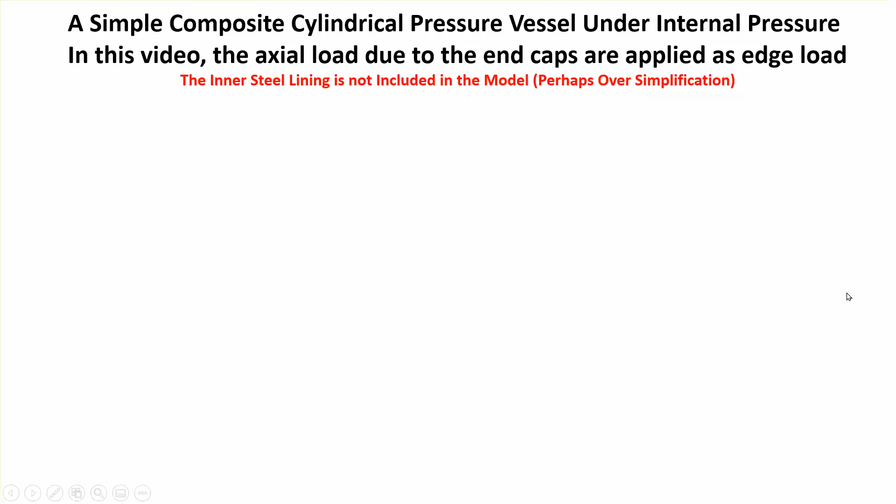So we have a pressure vessel like that, and on the surface of it there are three layers: 15 degrees, minus 15 degrees, and 90 degrees. The diameter of the vessel is 12 inches, and these are the geometrical properties, and it's internally subjected to 1000 psi.

Now, in this video, I'm not going to model the end caps, okay? And that being the case, you can ignore this line, but in the follow-up video, of course, these ends are also made of two-layered composites, which we're going to use.

So we're going to assume that the thickness of the ones that are 15 degrees and minus 15 degrees is the same, 0.05, and the thickness of the lamina or ply which is 90 degrees, going circumferentially, is 0.15 inches. All right, let's move on.

My modeling strategy is going to be, obviously, this is your cylindrical surface, so this is what I'm going to be modeling. And these end faces are going to be subjected to edge pressure, or edge load, actually axial load, which are coming from hand calculation.

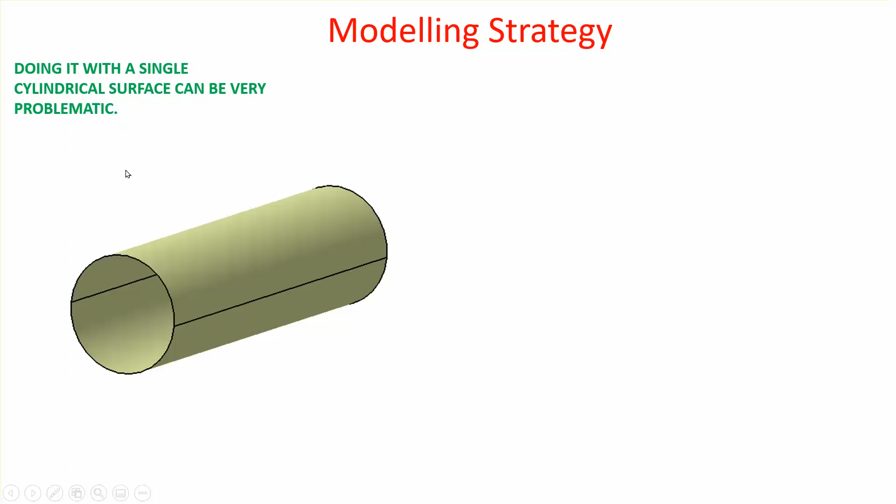So my strategy is to actually model this cylindrical pressure vessel as two half cylinders, the top one and the bottom one. For each one of these, I will define a rosette. The only difference between the two rosettes is that in the bottom one, Z goes down, and in the top one, Z goes up, and the direction of X is also changed. This allows me to easily create those plies without any glitches.

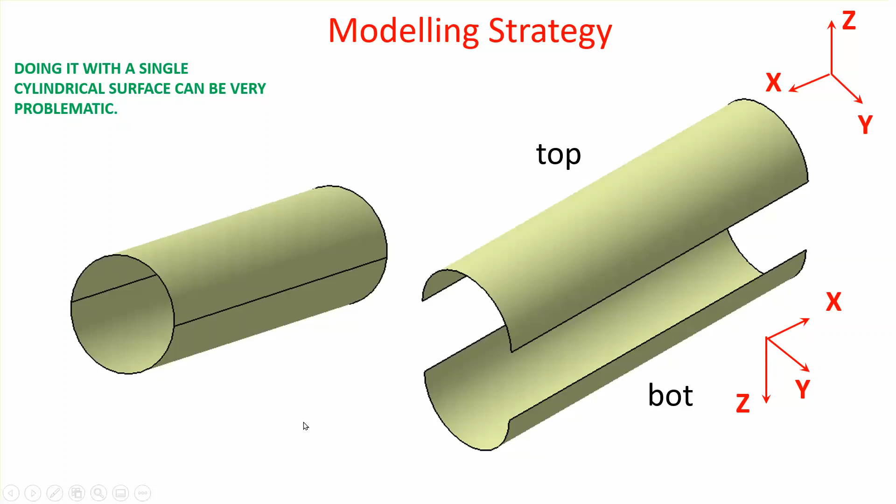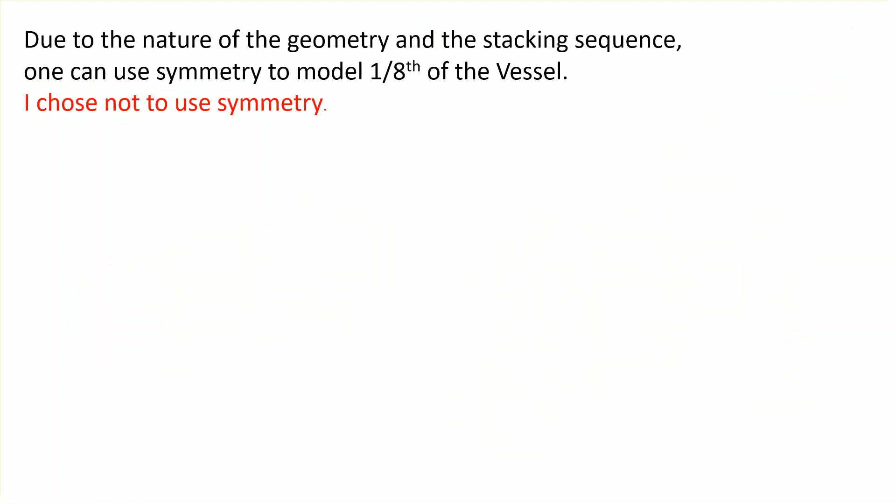So this problem, because of the nature of the geometry and the loading, and of course the stacking sequence, there are planes of symmetry. There are two planes of symmetry, actually three planes of symmetry, but I'm not going to use any of them, so I will model the actual vessel.

The hand calculation that I was talking about comes from basic strength of material type calculation. So you can see if you take a patch out of this wall, this is basically under biaxial loading. There's no shear in that particular patch.

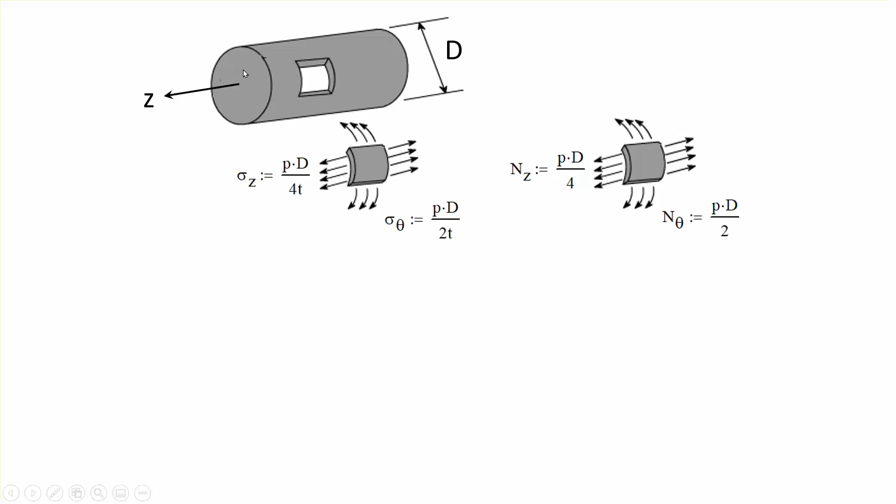Okay, and what I'm going to be doing is this value that you see here is called NZ, pressure times the diameter over 4, is what I'm going to be specifying on the edge, on this circular edge, without actually modeling the cap itself, front and the back. So basically, this is what I'm going to be doing.

Based on the dimensions that I gave you, that thing that I'm going to be applying to the edge, circular edge on the left and on the right, is just 3,000 pound-force per inch. Okay, and of course the internal pressure is 1000 psi. Notice that we no longer have a cap. This is why we're replacing it with an equivalent static load, which is this edge load.

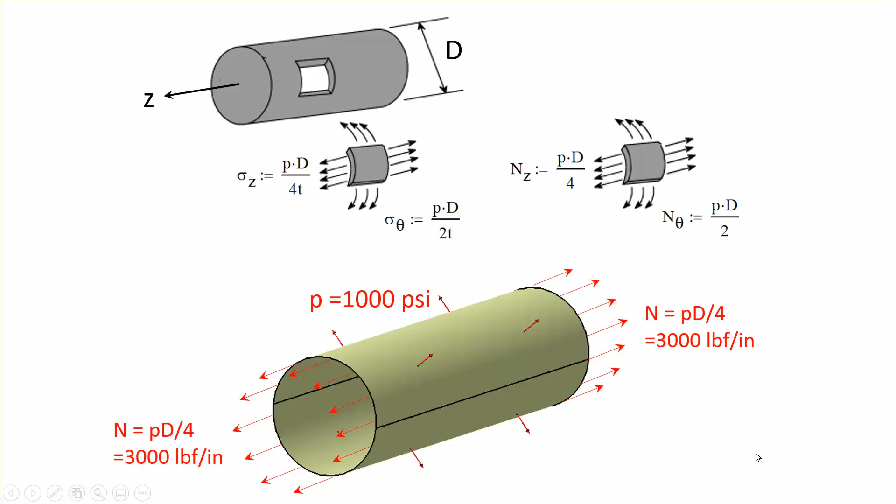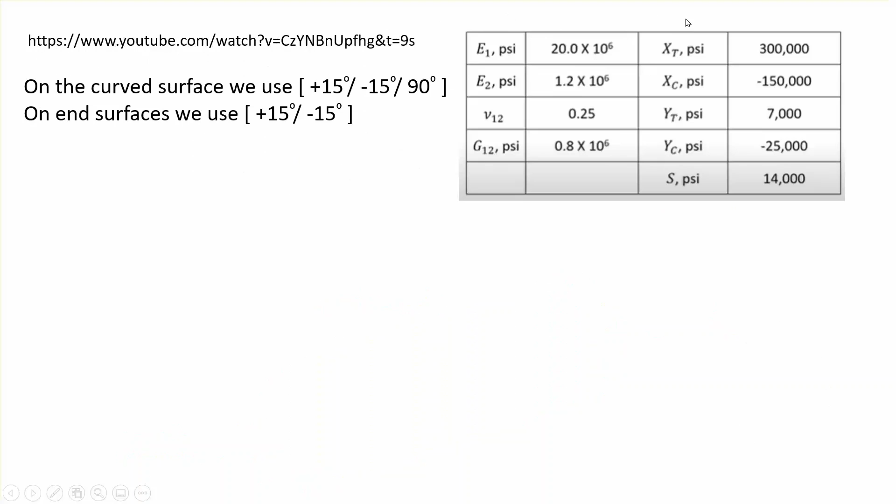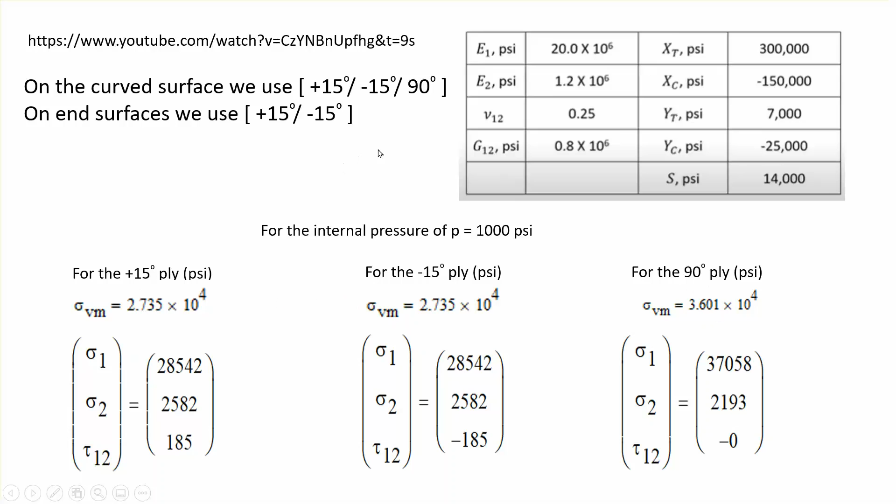Now notice that for all practical purposes, these are zeros compared to those other two numbers because they're orders of magnitude smaller. Okay, so von Mises stress for the 15 and minus 15 is going to be the same, roughly 27,000 psi, and for the 90-degree ply it's going to be 36,000 psi. So we're going to be comparing our Catia FEA results with these numbers. Okay. All right, let's move on and make it. So I'm going to keep this thing handy here, down below.

First thing, because I have two different thicknesses for these different plies, in other words, 0.05 inch for the 15 degree and minus 15 degree, and 0.15 for the 90 degree ply, I'm going to create two materials. The properties are the same except for the cured thickness. So let's go ahead and do this thing at infrastructure, material library. I'm going to create one.

So this one, let me first of all call this thing, so I will call it carbon epoxy, 0.05 inch, right? The 0.05 inch as the cured thickness, basically. So apply. So notice that the name changes here. And then for composite, we're going to say unidirectional, okay, unidirectional, and the cured thickness is going to be 0.05 inches. Okay, so that's this. And then for analysis, we're going to use 2D orthotropic.

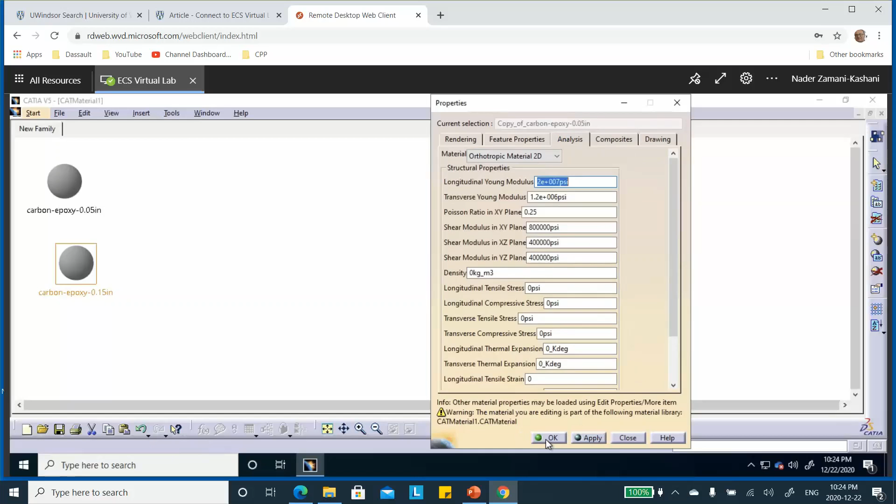And I'm going to set that value. So under the composite, this is going to be 0.15 instead of 0.05. Okay. And apply. And then I don't have to input these things because they're the same values. Okay, good. So we say all right, and now we're going to save this thing in that folder that I have created on my desktop. What is that? It was called pressure vessel. Let me see now.

I thought... I don't see the name, so I'm going to create actually what I want. So we're going to say new folder, pressure vessel, PV ends not modeled. So that pressure vessel's right there, and it's not modeled.

And this library that I created, why don't I give it a name instead of Material 1? How about calling it pressure vessel? Pressure vessel. It's going to go into that folder. Everything that I made is going to go into that folder, including my material library. So I'm going to close this. Now we're going to start our part. So let's start with the part file.

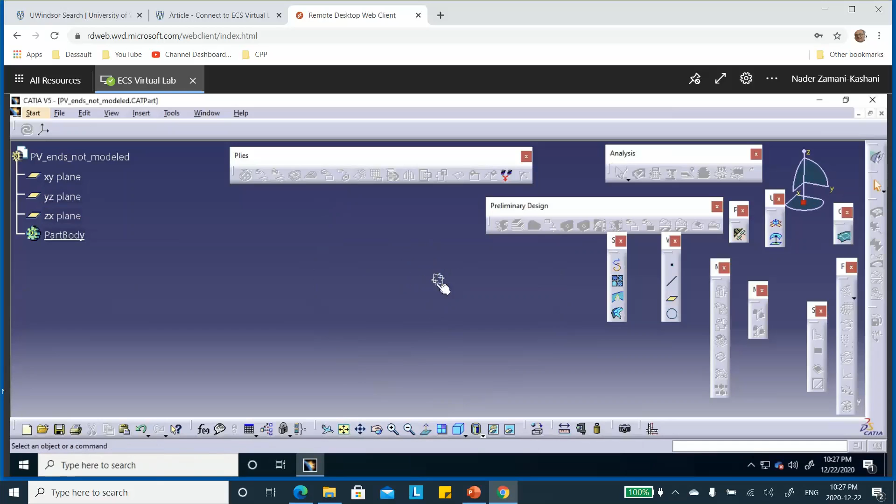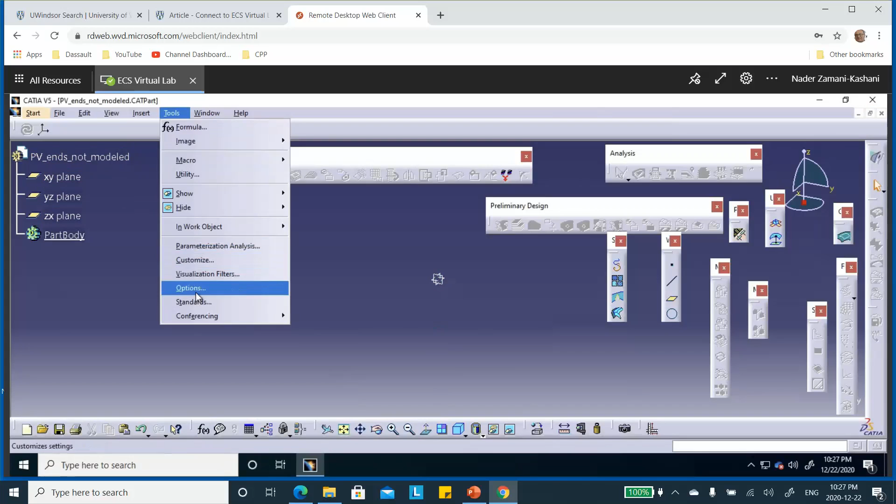All right, I noticed that these planes are very small. Of course I can zoom in, but something is not right here. Let me see if I can change the plane size. So tools, options. I didn't expect to run into this problem, but it's okay.

We'll find it. Infrastructure, mechanical, part infrastructure, part design. Well, actually not there. Sorry. Infrastructure, part infrastructure. Part infrastructure right there, and display. This axis system and plane. Maybe I changed this thing, so we'll see how it looks. There. Oh, whew. Okay. So save it.

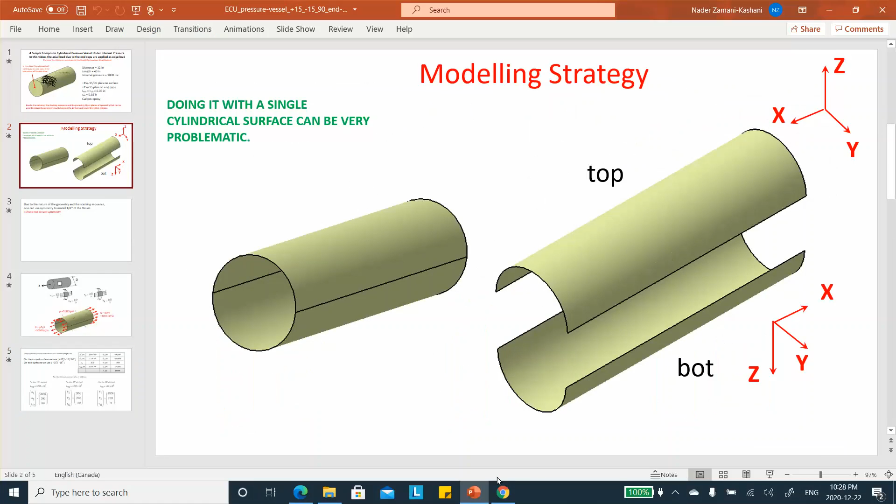Now, notice that my strategy is to make these two pieces. So the radius here is 6, and the length is 40 inches. So we go to the YZ plane, sketch. You have to be in Generative Shape Design to create surfaces and things like that. So we're going to sketch. Okay, circle. That.

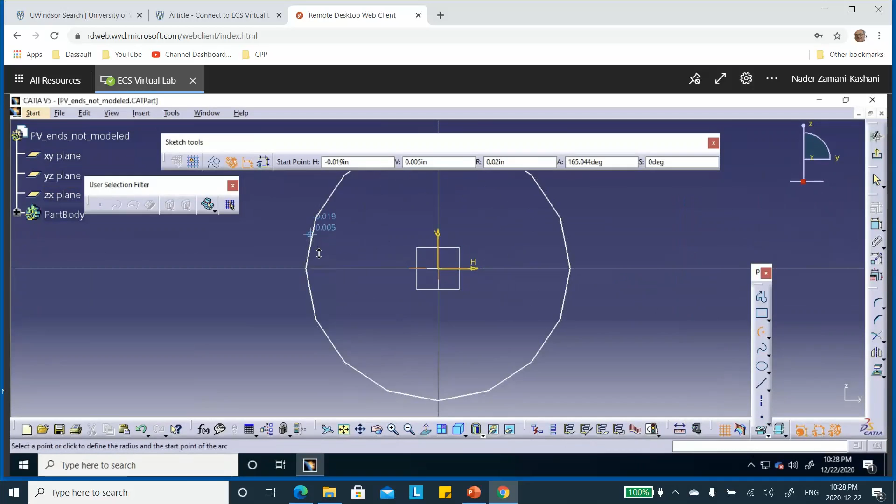Okay. I noticed that because I made some changes here, that's why grid size and things like that look weird. So let me first fix this thing. Let's put some dimension here. This is supposed to be 6 inches, right? 6 inches, and fit. That's a lot better.

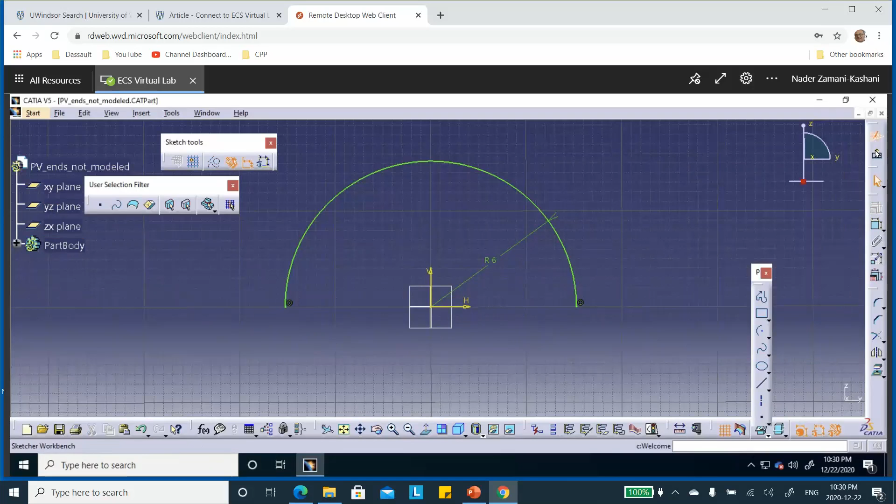And I just noticed that this point is not exactly on that line. So this point, control, that axis. We're going to make it coincident. There. Very good. So exit. And then we're going to extrude that. There's the extrude. Mirrored extent. And 20 inches in each direction, so that gives you a total length of 40 there.

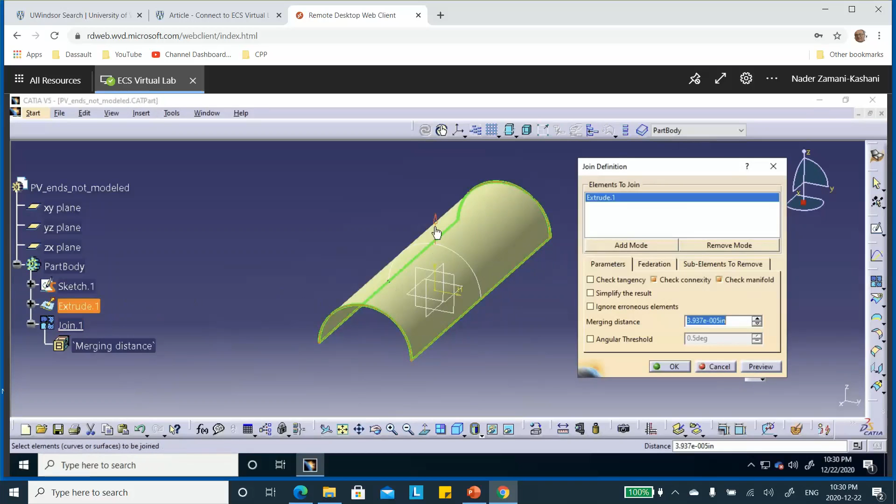Now, if you watched my earlier videos, you notice that I always join this thing, because when I join, it basically gives the surface a direction. In this case, the direction arrow is up, and I flip this so that it goes down. When you do this, you give it a direction. When you create shell elements, the normal to the shell elements always goes opposite to the normal of this join entity, which means you have control. You're not going to get unexpected normals to the shell elements.

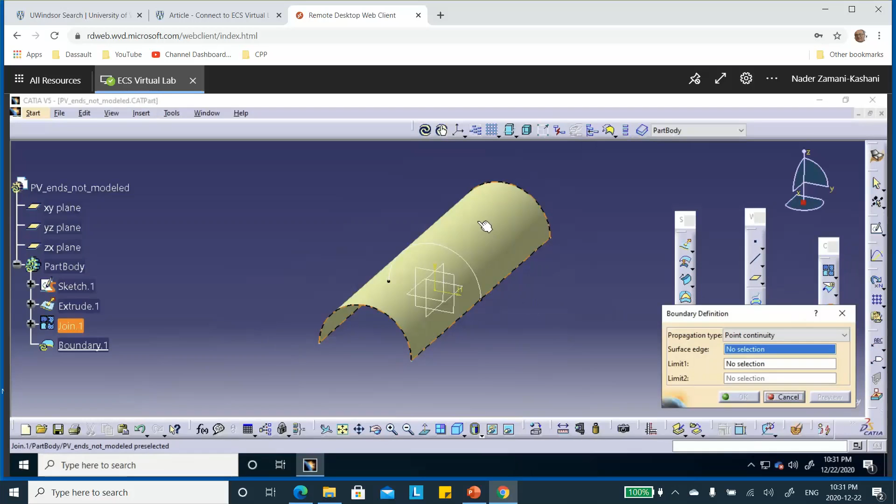Okay, so the next thing I want to do, I want to extract the boundary of this. Where is the boundary? Let me move this thing out. The same place that you see the join right there. There's the boundary. See this? You click on it and you select that join surface, and it extracts the boundary. Okay, so there. And that's pretty much it.

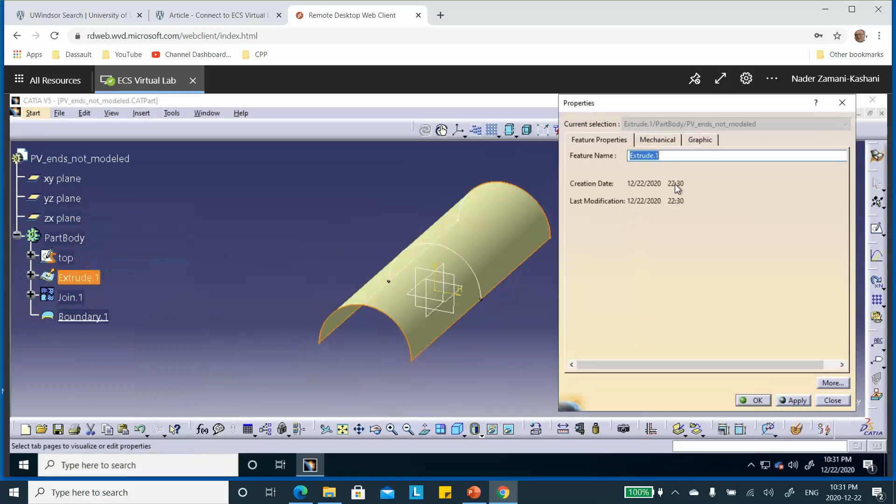The only thing I'm going to do is rename all of these to say top. So right click, properties, top. This is for bookkeeping purposes. You always know what you're picking later on. So properties, top, properties, top. And the last one, boundary, also top.

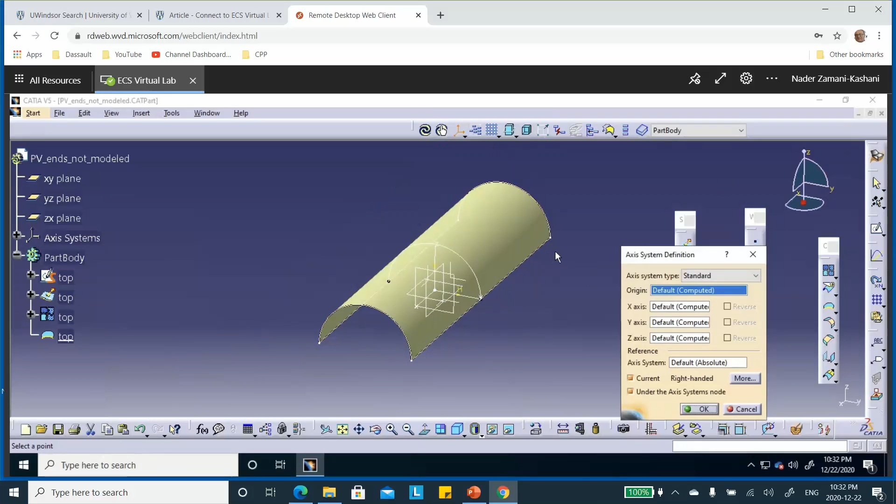Now at this point I also will create an axis system, which I'm going to call top. So there is the place that you use axis system. You click on it. Now, ordinarily, it places it at the global origin. You can see that it's right there with Z pointing up, aligned with the global XYZ. This is fine, there's nothing wrong with it, except that I would like to move this thing a little bit higher so that it doesn't clog the picture. Either higher or, yeah, maybe that's a good idea.

So I'm going to put the cursor there, right click, create a point, not on a curve, with coordinates. So the height of it, remember the radius was 6, so I'm going to make it 10.

So that point origin is going to be way up there. Preview, so it's going to be right up there, maybe even higher, 15, right. And say, okay, I'm happy with this, except that I don't want this thing to be my current coordinate system. So I'll uncheck this thing, it becomes solid, it becomes dash.

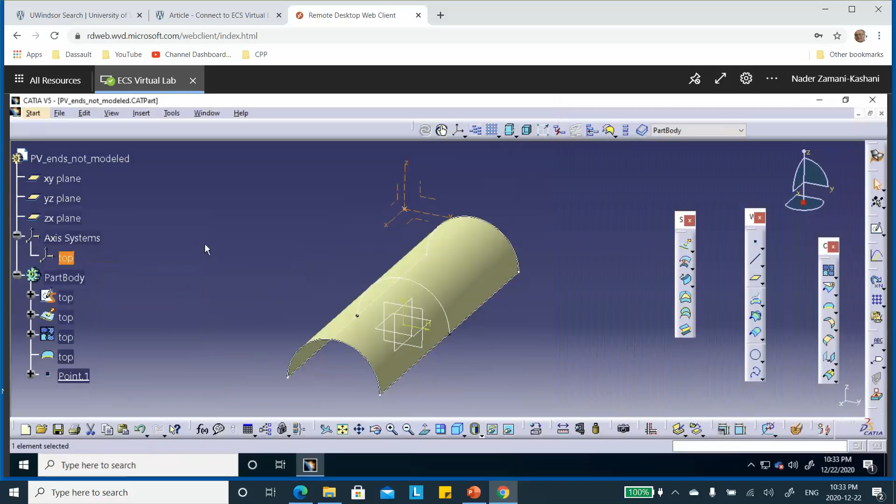That means that the global coordinate system with origin sitting down here is still the global coordinate system. While we're at it, we're going to rename this thing also to say top. So properties, top. I will repeat exactly the same thing for the bottom piece, okay? So once again, on the YZ plane, we'll sketch another circle like that, semicircle like that.

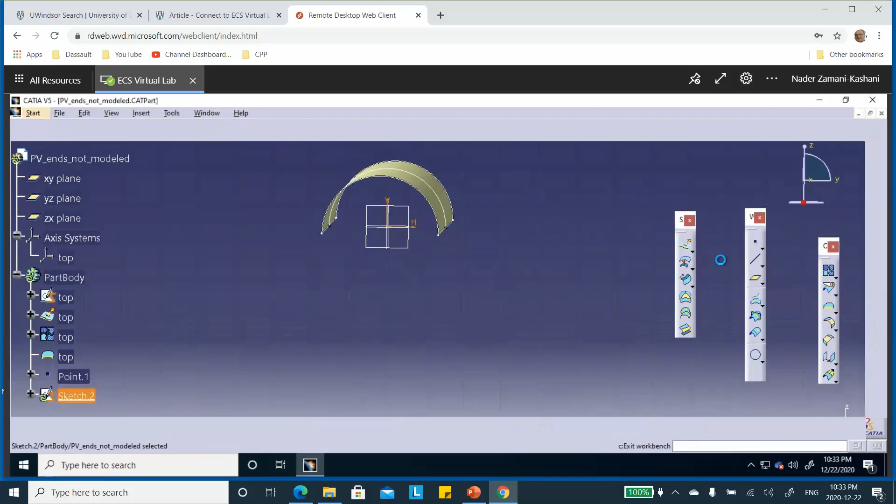There we are. Give it a dimension. It was 6 inches. 6 inches. Okay, exit. And then we're going to extrude it. There's the extrude. These numbers are the same as before, so it does it correctly. Okay, and then I'm going to join it.

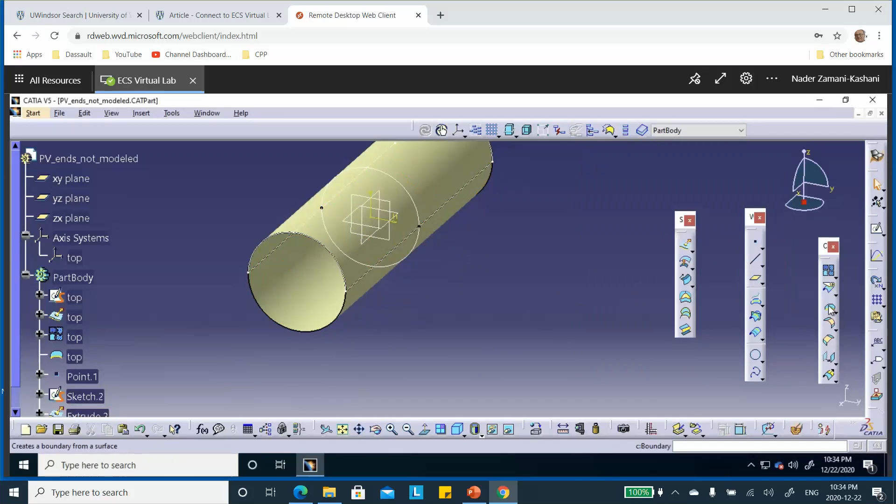You click on the join, click on the bottom surface, and just to double check, you click on it, you see that the arrow is going to be pointing away from that surface. I click on it so that it goes towards the inside of the cylinder. And finally, the boundary. There's the boundary. See that? And you select this thing that you joined. The boundary is going to be extracted, and you're going to say okay.

The reason that we need these boundaries is because later on we're going to create plies, and I'm going to do that manually for you, although it's a laborious process. You have to do it, I don't know, 6 times, 5 times, but you have better control. You can do it with zone method and things like that. You just leave it the way it is.

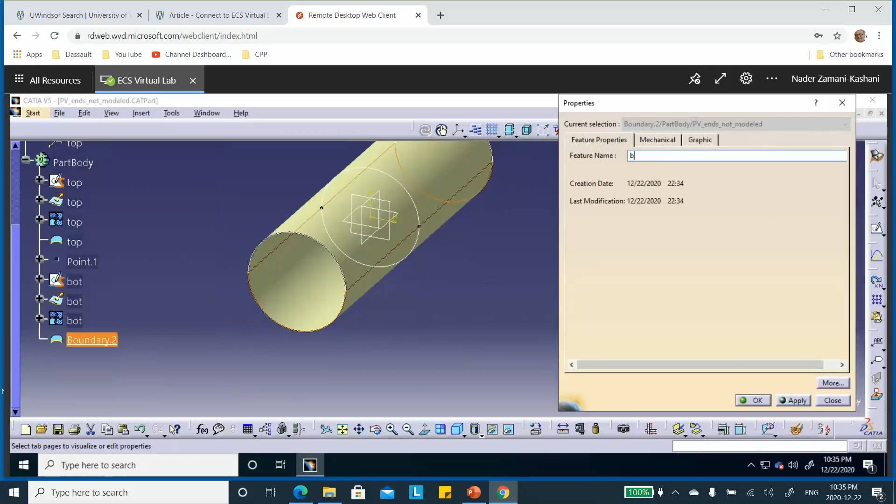Okay, so let me call this thing top. Sorry, bottom. So properties, bottom, BOT, properties, BOT, join, we're going to make it BOT, and boundary, we're going to make it BOT. These steps are not necessary, but it allows you to have a better idea when you pick something what they are. Then we're going to create our coordinate system,

create a point. Notice that I already have the set, not on the curve, by coordinates. I already have my 15 here, so I make this thing minus 15, and it will create a point down there, except that, first of all, I want Z to point down. Remember, the other one is up here, right?

I want Z to point down, so I put the cursor on the Y-axis, right-click, and rotation. And if you rotate by 180 degrees, minus 180 degrees, it'll take care of it the way I want, minus 180. Notice that Z is down, X is going to the right, exactly what I wanted, and we say okay.

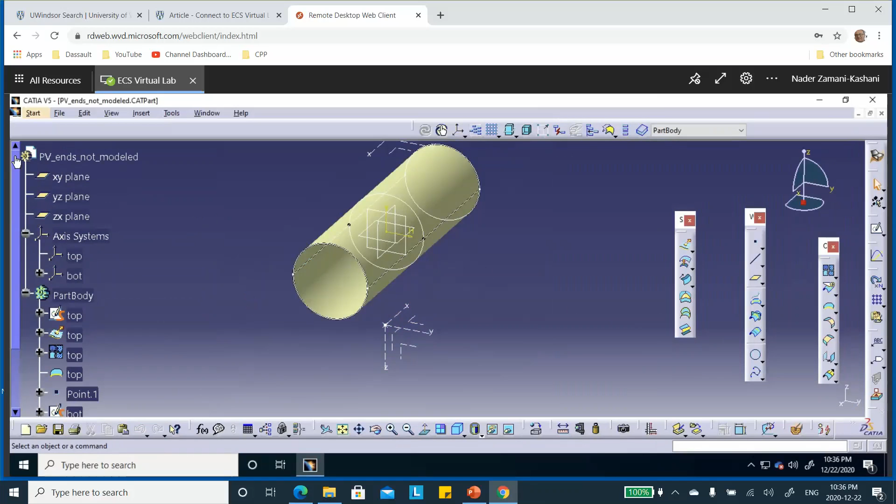Now why don't we also call this thing bottom? Right click, properties, BOT. Okay, very good. Okay, so save everything. We are pretty much done as far as creating the model is concerned. So let me go ahead and switch to the mechanical design and what is that? Composite design.

First thing we're going to do is to create our composite parameters right there. Add the material. We're going to go to that library that I created. It was on my desktop, and it was called pressure vessel ends not modeled. There's my material library. Remember I created this?

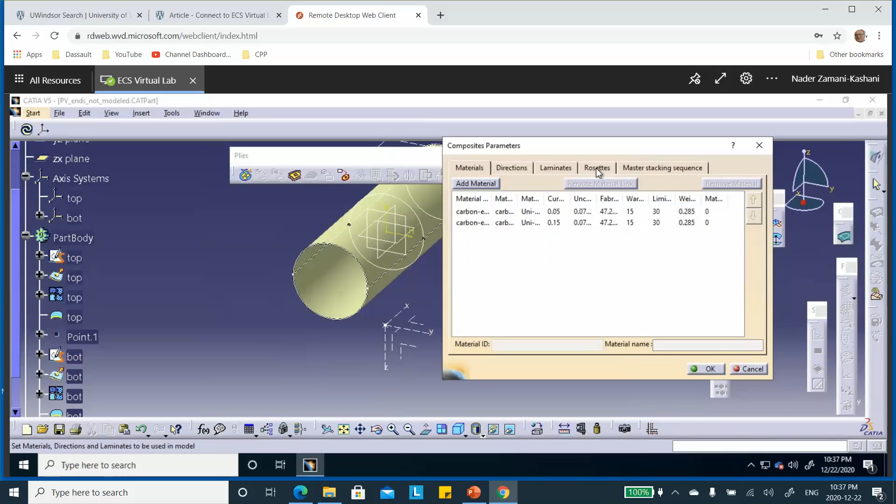You say okay. They'll tell you that there are two materials in there, and I want both of them to be used. Okay, so I say okay. That's the one with the cured thickness of 0.05. And then again, add material, cured thickness of 0.15, which is going to be used for the 90-degree ply. Okay, very good. Now here, we also have to create a rosette, add a rosette.

Now, these are going to be used as my rosette. So add a rosette. And axis system is, I'm doing the top one, right? So there we are. And you have a choice of Cartesian. There is no cylindrical here.

If you go to the drive shaft video segment that I already posted, this window looks a little bit different. It's Cartesian or cylindrical. Here they have added a few things, and you can do cylindrical here too, but I'm not going to worry about that. Notice that the good thing is that when I selected Rosette 1, it created top axis system. While I'm here, why don't I give this thing the name top Rosette? How about that? Top Rosette.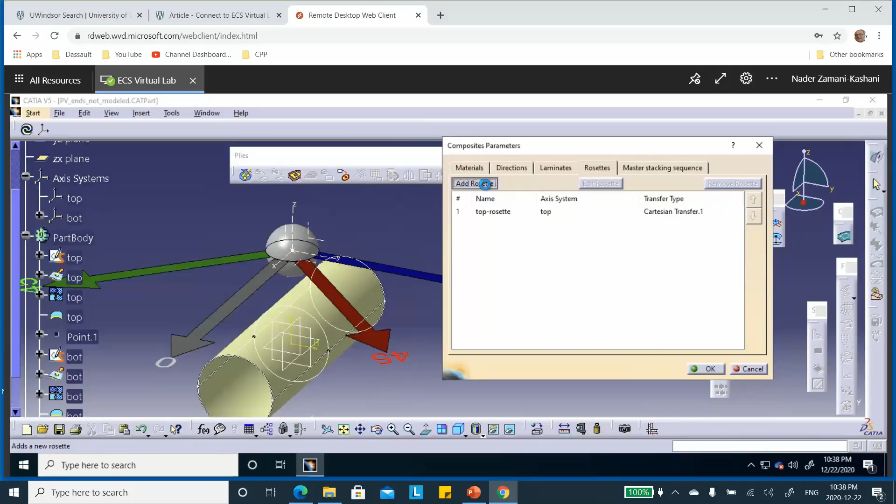I think it is double T. Okay, nothing else. So it's Cartesian. Everything is good. We say okay, and add another one. This time we use this bottom one, and I will call it the bottom rosette, BOT rosette. And again, it's Cartesian, so we say fine. So the two rosettes are created also.

This window also looks different, okay? So if you're using older versions, R21 and prior to that, you have to do the same thing, but the dialog boxes are going to be different. And we say okay, so we don't need these rosettes. I'm going to hide them. Hide and hide. Excellent. So do a save. And now we're going to create our plies.

The first thing is we're going to create a ply group for the top section. So select it. Surface is of course here. Notice that the top surface is selected. The name of this, I'm going to change this to top ply group basically. And the direction of the draping is downward. I want to stack them in the upward direction. So flip it. Notice that it flipped right there. You can see that. Flip. And for the rosette, I'm going to select top rosette. Okay. And that's pretty much it.

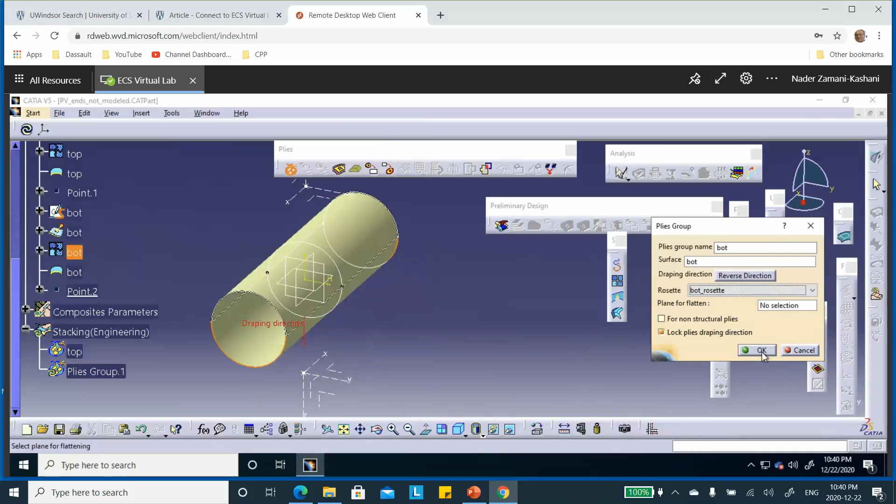So we say okay. While we're at it, we might as well create the bottom one and then we create our plies. So here is the other ply group. So we're going to call it bottom, BOT. For surface is the bottom surface. Flip the direction so it's stacked outward. And for the rosette, I'm going to select the bottom rosette. And that's pretty much it. Okay.

Now we're going to create our plies. So let's work on the top one first. You click on this ply. It says go and select your ply group. So I'm going to do the top one first. Notice that there's going to be ply one. Now for the boundary, for the curve of the contour, I can go and select that top boundary that I extracted. See that? And then attribute is going to be 45 degree. The first one is 45 degree. I don't have to worry about top rosette because it's already selected automatically. Notice that the ply is created here, right there. You can see that.

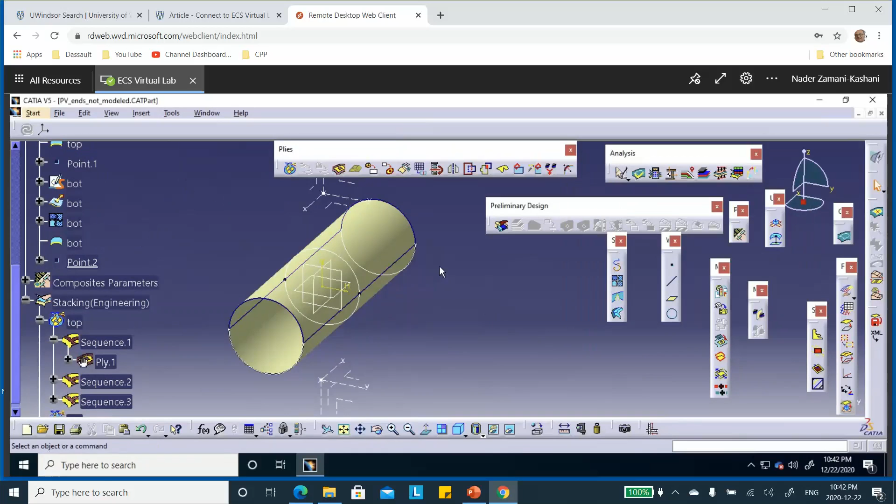Let's do another one. Again, the same ply group. The boundary is still the same as what was up there, the top. The attribute is going to be minus 45. Okay, the third one, the third ply in that top group, boundary is still the same. And for the attribute, we're going to say 90 degrees. Now notice that this is a kind of laborious process. So it was easier if we created these plies using a zone. If you had 50 of these, then you really don't want to do it 50 times, although you can actually copy and paste plies. But anyway, this is a simple problem. That's all right.

Now let's do the plies for the bottom group. So click on the manual ply, you select it. And for the boundary, for the contour, you're going to take the bottom boundary, and for the attributes again it's 45 first. Okay, next one, same group, the boundary is BOT, attribute is minus 45. Oh, I don't know why I said 45. This should have been 15, right? So okay, I made a mistake, so we're gonna fix it, don't worry about it.

Okay, let's do the last one. The last one is actually still 90. So the boundary is BOT, attribute is 90. We say okay. I made a mistake because I thought these were 45-degree plies. Actually, they were 15 and minus 15. So we can always go and fix it. So we go back to composite parameters here, and under directions, these are the default ones. I want to add 15 and minus 15 to it.

So I add a direction. I say 15 and 15. The value is 15. Let me change the color because later on I want to be able to see these things. Another one, minus 15, minus 15, and value minus 15 here. And the color, I'm going to make it darker brown. So we say okay. We say all right.

Now, what we have to do, unfortunately, I have to change my ply angle. So I go to this ply 1. Under attribute, instead of 45, it is plus 15. Instead of 45, it's 15. And I go to the second ply.

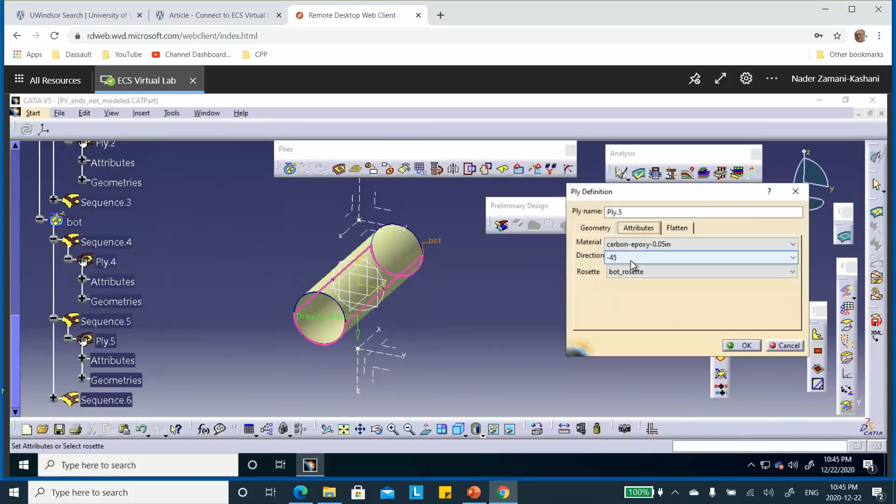And for attribute, I choose minus 15. And I have to do the same thing for the first two plies in this other group. So for attribute, instead of 45, I want 15. And this other one is also, instead of minus 45, I want minus 15. Okay, I didn't mean this thing to happen, but it's good if you didn't know how to do it, or if you wanted to make another practice, we just did it.

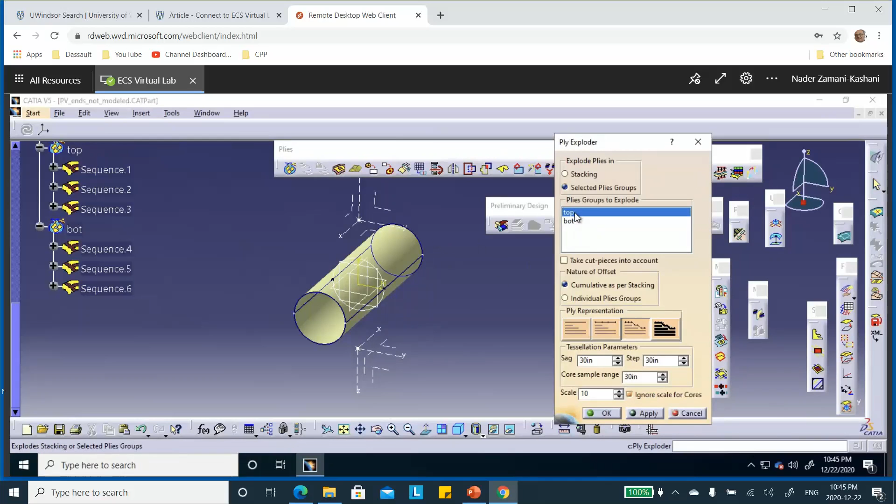All right, let's save everything. Let's check actually. So you can go and select the ply exploder. I have two groups. The top group, it should be 15, in other words, brown, darker brown, and then 90, I think it's maybe blue, I don't know, let's find out. There, yeah, okay. Let's change the scale here so that we can see it better. We may make it 20, apply, yeah. So you can see that it is 15, minus 15 and 90.

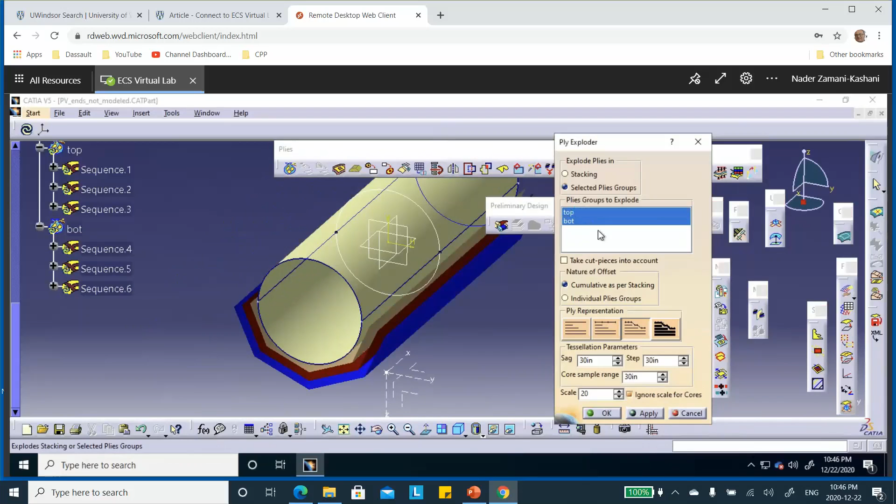And if you go to the bottom one, same thing should happen. There we are. If you want both of them to show at the same time, apply, there. Okay, so they match, cancel. Very good, save. Now we are pretty much done as far as the modeling for the composite is concerned. Now we're going to go to generative structural analysis and mesh this thing.

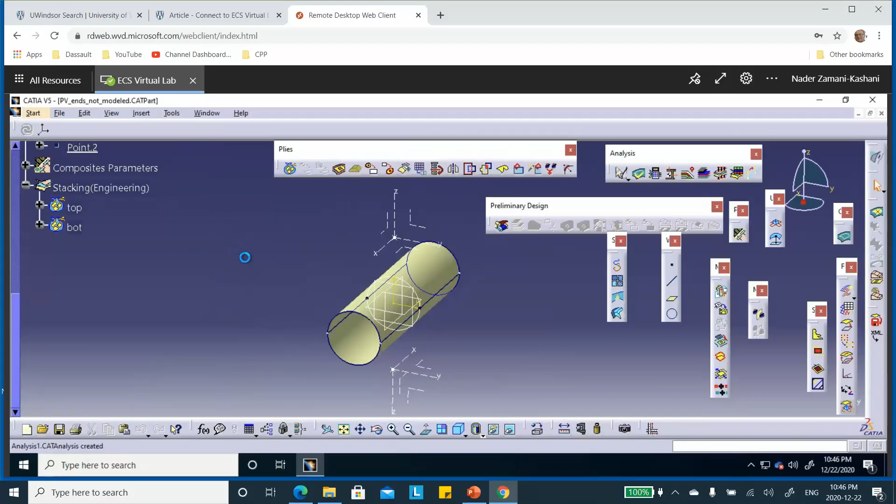I want a fancy mesh, so instead of going to generative structure analysis, I'll go to advanced meshing tool. Just like I did in many other videos before, we say okay. We're going to use the surface mesher right there. Select the top. 0.15, I'll leave it at 0.15 and then we see if it's too fine, we're going to change it. And then zap it or mesh it. And there we are. I think this is too fine. Yeah. So can say okay and exit.

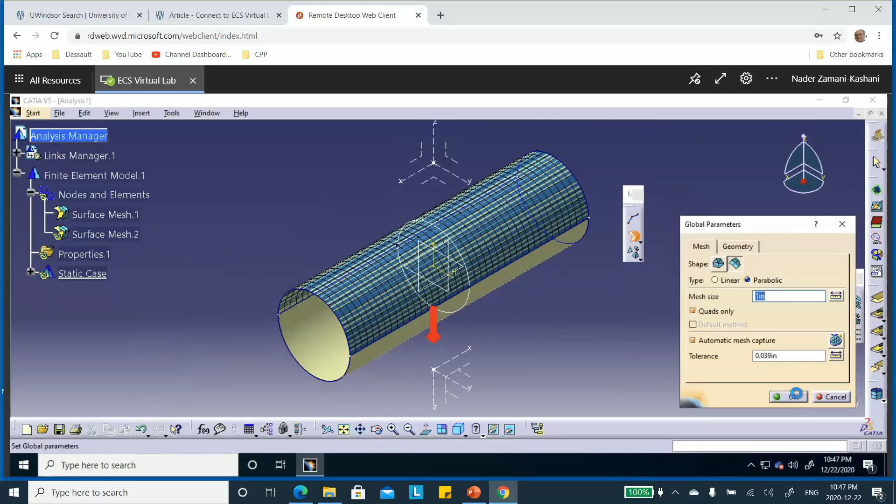But what I can do is I can double click on this surface mesher that I created. I'm going to change this thing to 1, by the way, parabolic and quad only, and then mesh it, zap it. There we are. Visualize, exit, and I do the same thing to the bottom one, surface mesher, the bottom joint surface. Everything is the same. Mesh it. I say OK, and exit.

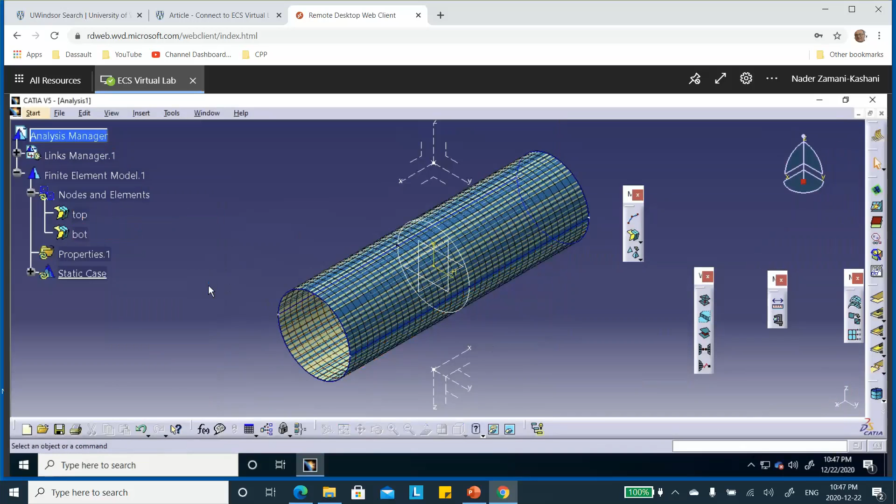Now it's a good idea if I change these names too. So this one is the top one, top, and this one is the bottom one, properties, bottom one, BOT. Okay, so now we're going to go to generative structure analysis to apply the loads and restraints and properties. You have to go there. You have no other choice. Advanced meshing tool is only for meshing.

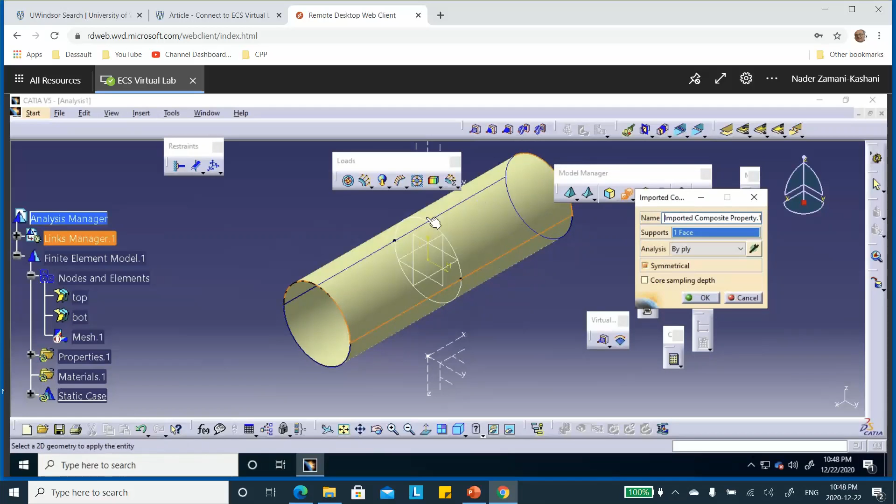If you want to see your mesh, you can put the cursor there, right-click mesh visualization, and there we are. If you're happy, just uncheck that, deactivate that. Okay, good. So let us actually apply properties, composite properties. So imported composite property. It's asking you, let's do the top layer first, or top part first. So the support is going to be this thing on the top, and for the ply, you're going to go to your tree and select top.

Okay, remember you have two ply groups. So the top one is what we're doing now. We say OK, and the symmetry means that it's going to be stacked symmetrically about this surface. We talked about this symmetrical checkbox in other videos. If you want, you can look at it and do it again. So the bottom surface, ply, and bottom group. Say OK, keep it symmetric, and we say OK.

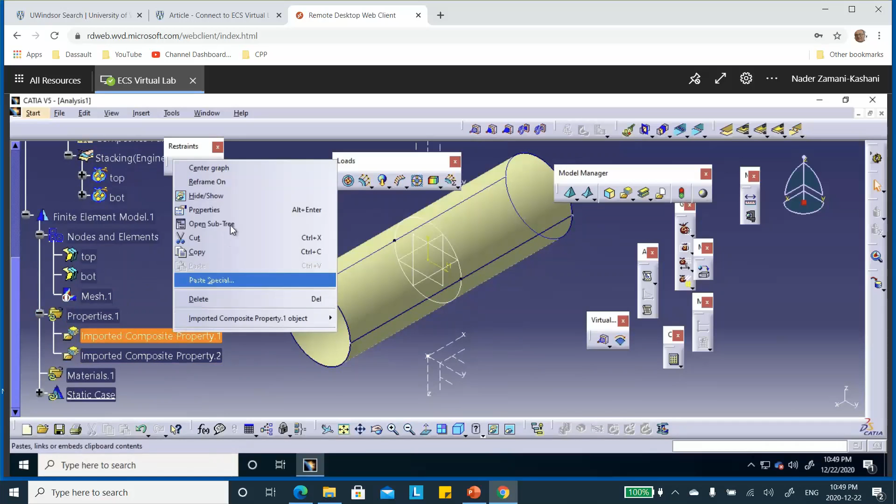Notice that the properties are created here. This is the first one, and this is the second one. Why don't I give these things meaningful names too? This is going to be top, and this is going to be bottom. Properties, BOT. You say OK.

All right, by the way, once you specify the properties without even applying loads and restraints and things like that, you can actually check and see whether the directions are correct. So what you can do is you can put the cursor on properties right there. See that? Properties, right click.

Before I do this, before I show these directions, I know that I don't have any loads and restraints. I understand that, but we can always say run and show me the mesh only, because I don't have anything else. And it did it.

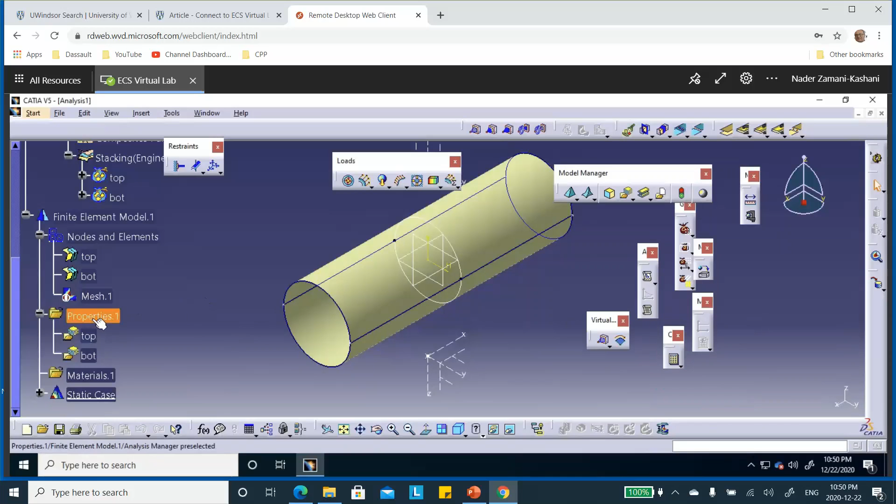Now, when you put the cursor here, right click, you see some other stuff showing at the bottom. So generate image, composite angle, symbol, and you say okay. Except let me unhide the part because it's easier to see what's going on.

There we are. Notice that these are the 15 degrees on the top, 15 degrees at the bottom, and the choice of the rosette, direction of the rosette and things like that - if you don't do that, these won't line up. I talked about this thing in the drive shaft video, so you can look at it, but this is okay.

So now you can also look at the other layers. If you go here, not the mesh, right here, double click on composite angle, more. This was layer one. If you go to layer two, notice that the direction changes.

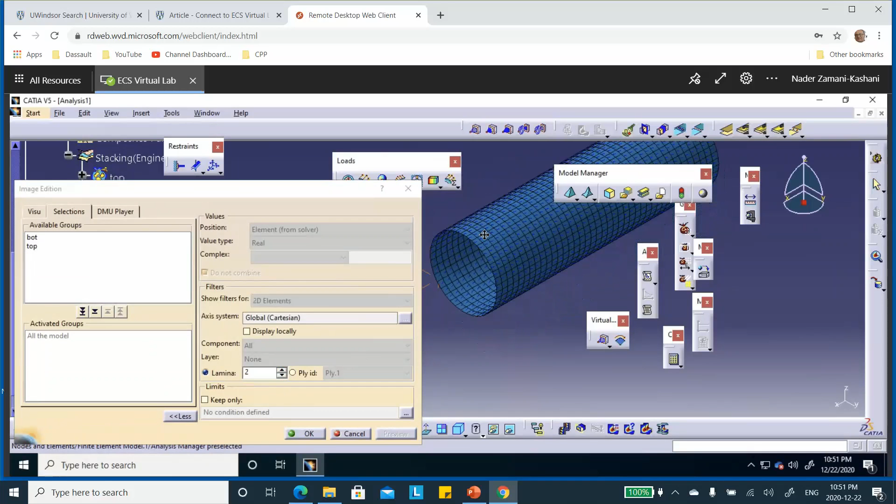See that? Let me bring these closer to you. The direction changes. And layer three, of course, is all going to be 90 degrees. You can see that. All right, we say okay.

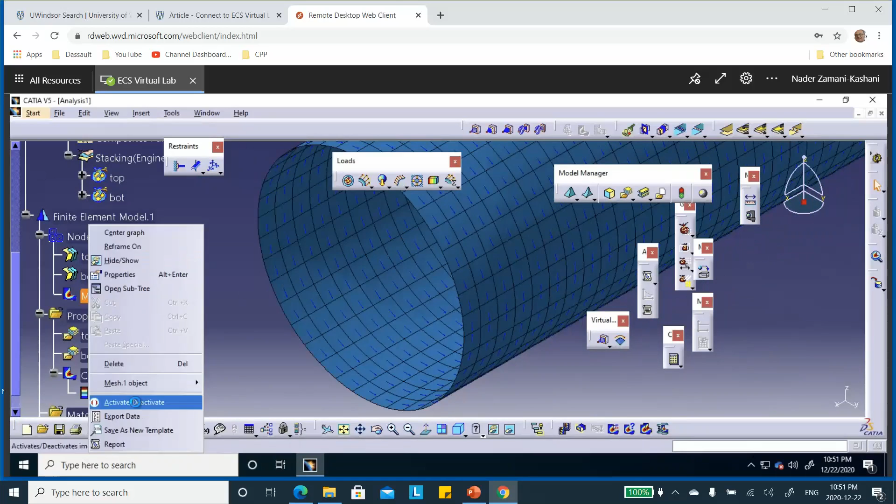The reason this color change is because I'm showing the mesh. I don't want to show the mesh, so let me deactivate this mesh. Let me unhide my part, it's easier to see on a different background. There we are. This was ply 3, composite angle in ply 3.

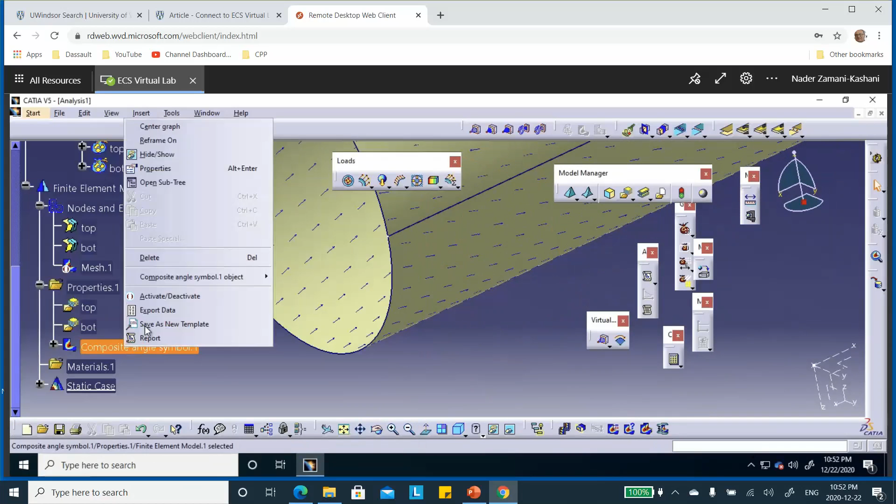Let's try it again, let's try 2. And as I said, these directions match - 15 degrees, 15 degrees, the lines match. Okay, so we're good. Deactivate this guy. All right, so let's go ahead and apply our loads.

So pressure, there's a pressure, minus 1000. If the direction is not right, we're going to fix it. So I'll select the top face and the bottom face. Notice that...

If I change this thing to plus, these are going to go point down. That is true. However, it also has to do with the direction of those joins that I flipped. So all I'm saying is look at your drawing, look at your screen, make sure it is what you want. That's all I want to say here.

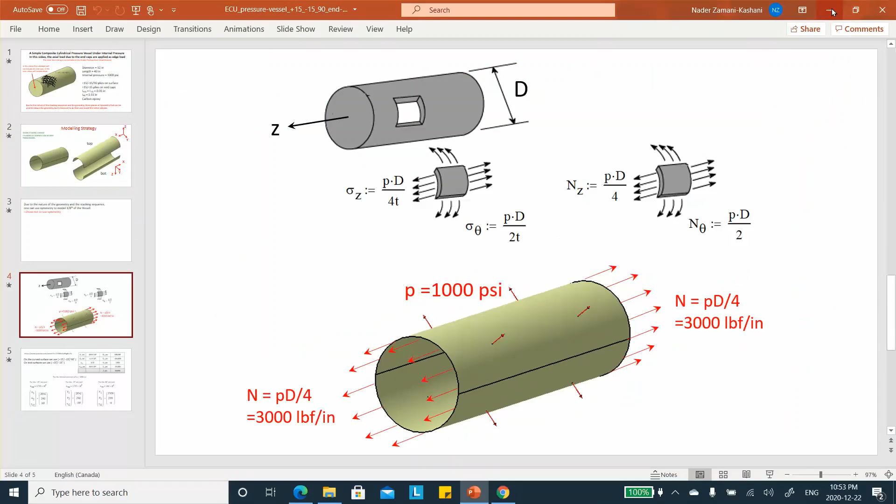Good. Now on this edge, on these two, I'm going to apply a load of 3,000 pound per inch, edge load of 3,000 pound per inch. So what we're going to do is there - that's how you do edge load right there, line force density. So I'm going to select.

Oh, look, I can't pick it. The reason you can't pick it is because those plies are blocking - those plies are showing here. So go and hide your stacking sequence. Hide this. And these boundaries are also showing.

So go to your part, hide the top, hide the top. Notice that now it's a black line. And hide the bottom boundary. This is a black line.

Now you can apply your edge load. So on this top, in the direction X, let's put down 3,000 LBF underscore inch, and I'm sure it's going to translate into this number, Newton meter.

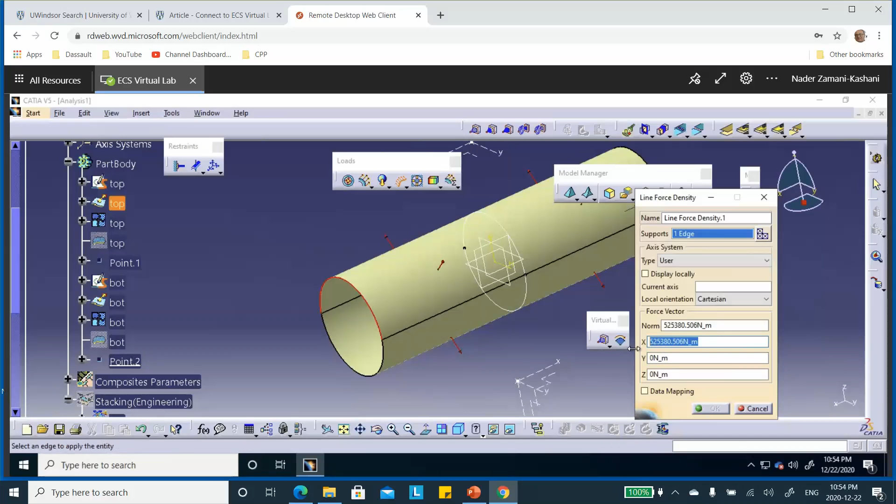Did it? Let me try one more time. 3,000, maybe this is correct, I don't know - LBF underscore inch. Let's see if it becomes 525,000 again. Yeah, that looks good.

Okay, so well, actually I can do it on both of these at the same time, simultaneously on these. Okay, yep. So we say okay. Oh, what is it asking?

Oh, it acted - in the previous run that I made, my coordinate system was user, but I want global here. The reason that I could not close this is that there was a user coordinate system here that I was using in the last run and I needed it, so this does not reset.

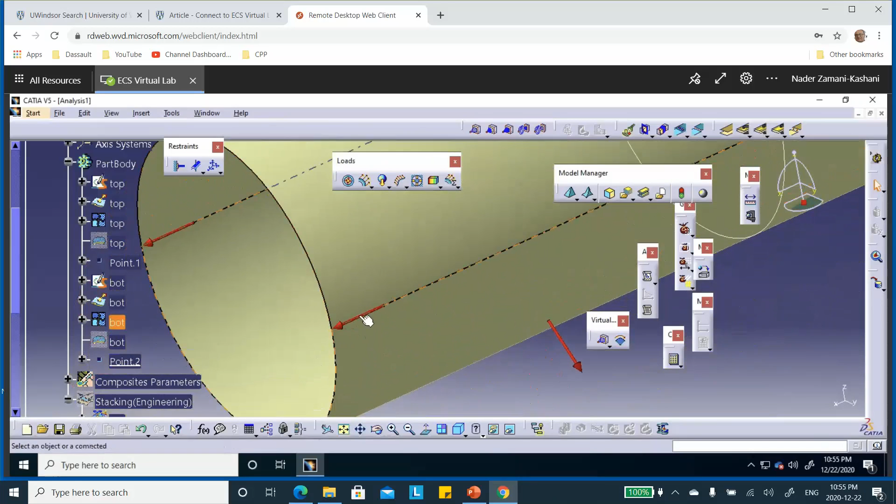So we say okay, and if you look closely, you see that the edge load is put in there in the proper direction. Now I go and do exactly the same thing on the other side.

So edge load on this edge and that edge, and the only difference is that - oh, this is distributed force, that's wrong, sorry. Edge load is right here. Line force density is here, the one that I just did. Top one and the bottom one.

And the only thing I'm going to do is put a minus sign there so that it pressurized, because it's pressurized, so it's going to go in the other direction. There, so if you look closely, you see that it is around that edge. This is not at these 2 points, it's on that edge.

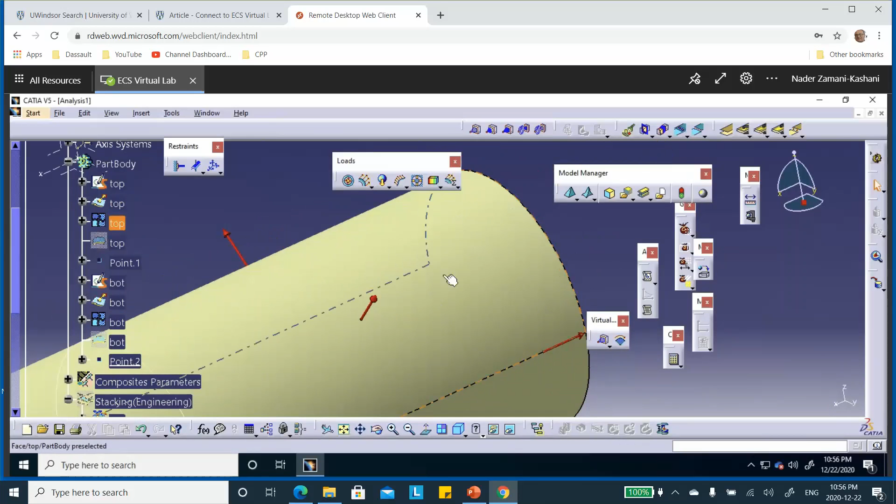It's the density, force density on that. Now, if I run this thing, it is not going to work because this is free as a rigid body motion. This can move as a rigid body motion. And we have talked about this on numerous occasions. I have to take away the rigid body motion by applying something like the 1, 2, 3 rule, or I can cheat and use the isostatic constraints, which automatically applies that 1, 2, 3 rule for you, but it doesn't tell you where it applied. So you got to be careful about this.

I suggest that you look at the video segments which deal with this isostatic restraint and the 1, 2, 3 rule. It's not going to be in the composite playlist, but it's going to be in the general FEA playlist. You click on it, notice that you don't have to pick anything. All it does is automatically put this symbol on both of these pieces.

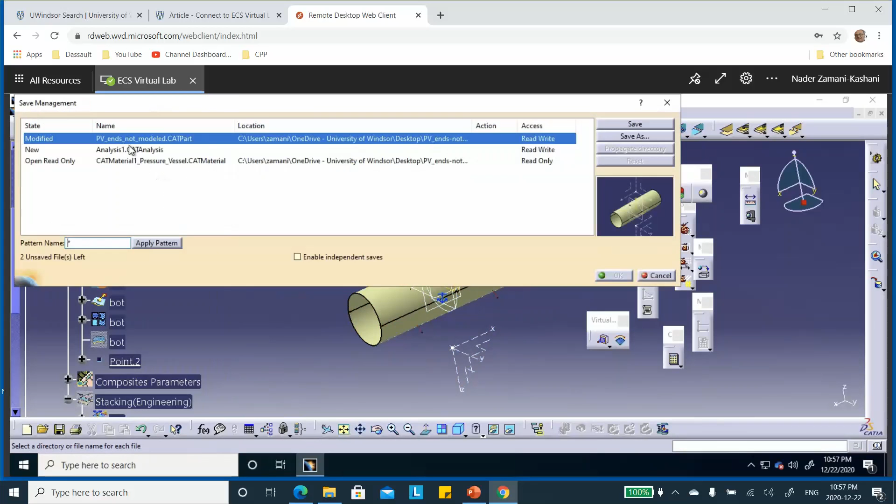Okay, before we run, I suggest we go and save. So file, save management, analysis, save as. In that same folder, pressure vessel ends not modeled, analysis 1. Okay, fine, it's going to go there.

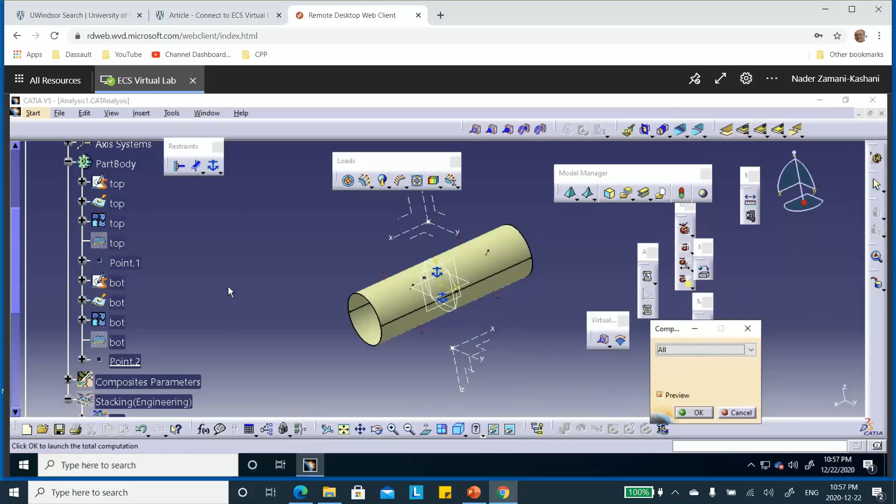And now we're going to run it, compute, and make sure it's not mesh only, it's all. That mesh only, you need, in order to see the direction of those arrows, the composite arrows, symbols, you have to run it either all or with mesh. So always pray. Hopefully nothing unexpected will happen.

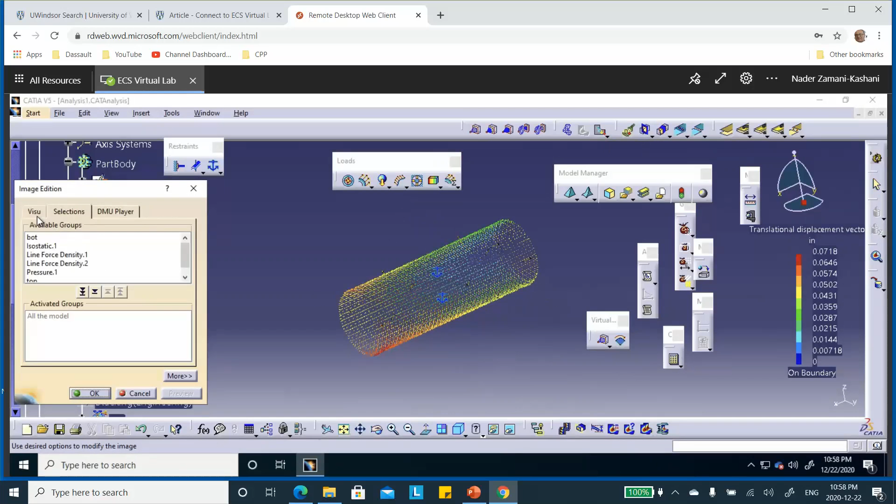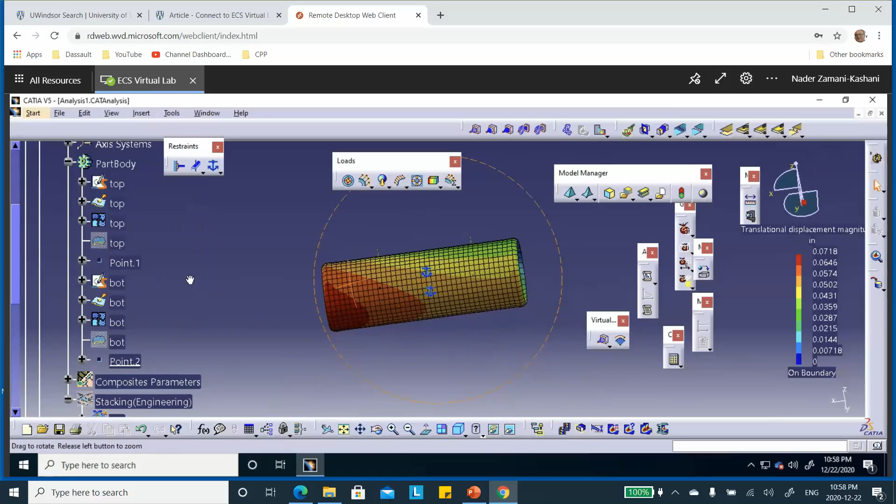Excellent, so first look at the deformation, displacement. You click on this, and there we are. Let's change the visualization to average ISO. I already have stuff that I don't like here, but anyway, we'll find out what the issue is. Also, this was displacement. Yeah, actually, displacement may be okay. So this is fine. This may be okay. We'll see.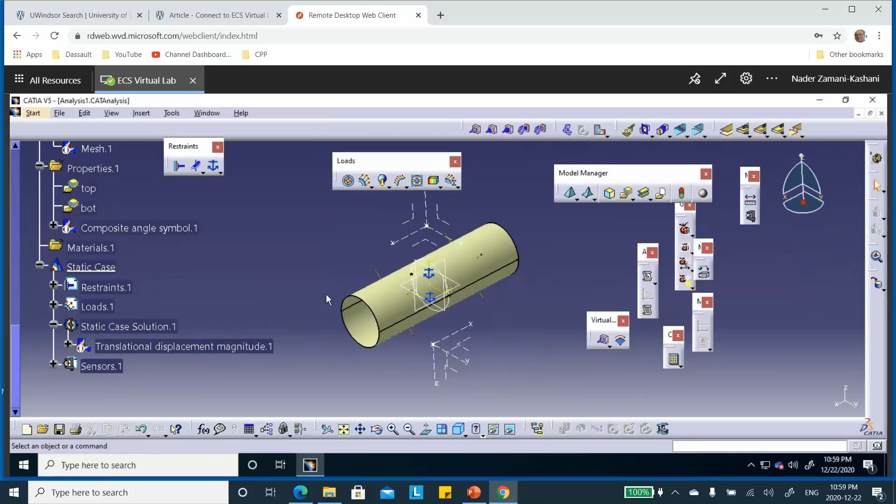Okay, I don't particularly like what I see here, so let's plot the stresses and see what we get. To plot the stresses, notice that the stresses are not active here. This is not the only place where you can plot the stresses. You can also do it somewhere else, but the way we plot stresses in composites, we put the cursor there. First, let me go to static case, static solution case, undo this, uncheck that. As I said, I don't like that pattern that I saw, but we'll find out what the issue is in a few minutes.

So we put the cursor on static case solution, right click, say generate image, and filter it with stress according to the stress, and select the elements components. Looks like that. Double click on this, or on the contour, and select Mises. Okay, very good. Wow, that looks good.

So first, let me change the shading to non-smooth. Well, first of all, if you see this color is 2 point, somewhere up there between 2.98 and 2.83. But you know what I'm going to do is make a box here, just to show the stuff away from the ends.

Okay, so how do we do that? We create a box group. There we are. This is a box group. It creates a box. You can resize it, you can move it around, etc. This is perfectly okay with me. You can resize it by selecting on this and getting these arrows and moving it around and translating. But this is good enough.

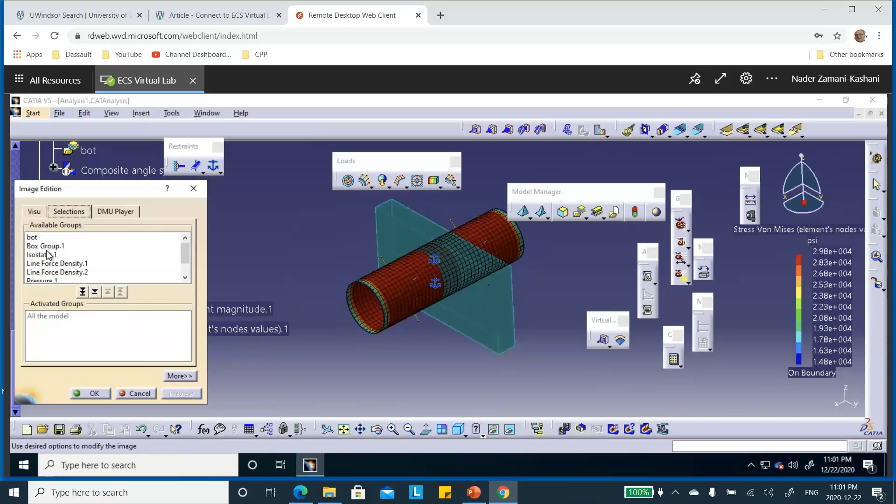So here, we'll go back to that von Mises stress, and I say, don't show me the deformed shape. So uncheck that. Notice that this is the undeformed shape. But then you go on the selection, say, don't show me everything, just give me the stuff in the box group right there, and hide the box. Hide the box. Whoa, look at these numbers.

2.85 or 2.86, 10 to the 4. Now, this was, which layer is this, by the way? This was layer 1. If you go to my last page, this is not very far from here, okay? The theoretical solution for the 15-degree ply is going to be roughly 27,000, 2.7, 10 to the 4. And this guy is going to give it to you as 2.8, 10 to the 4. So it's a pretty decent approximation, okay? Now, if you go to layer 2, almost the same, okay? We expect that because these are supposed to be the same in theory.

They're almost the same. And if you go to layer 3, now I don't like that. This is 10 to the 5, and I don't like that. So let's go back here.

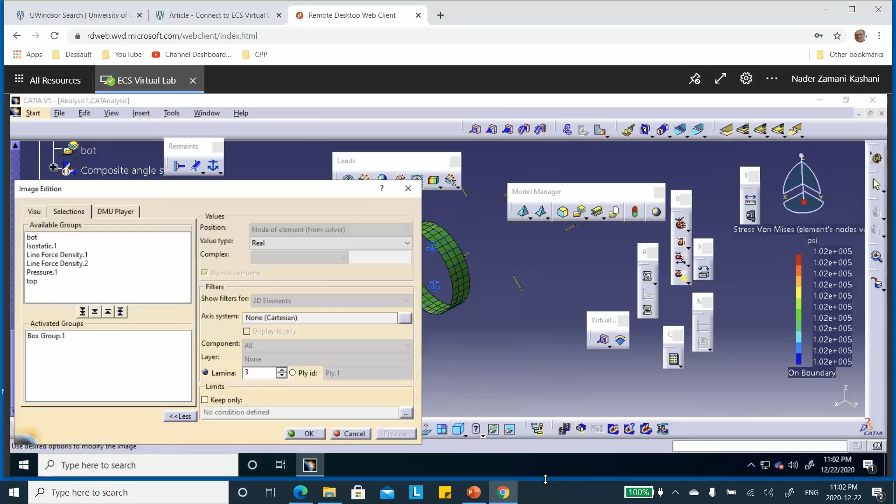This is supposed to be 3.6 times 10 to the 4, 36,000, and this is coming out to be 100,000. So we must have done something wrong. Let's go ahead and find out, make sure everything is okay.

I saw that deformation pattern and I didn't like it. You can see that the von Mises stress in layer 3, in ply 3, is actually way off. Now what I suggest is we go and check our ply information, and for example look at ply 1.

Carbon epoxy thickness 0.05, 15 degrees, that's correct. Ply 2 attributes: carbon epoxy thickness 0.05 and angle minus 15. And ply 3 is supposed to be 90 degrees, and there it is, it's 90 degrees. But the material, when I was creating my ply, I didn't realize that I had a different material.

That's very easy to fix. These have to be fixed, the one at 90 degrees. So I'm going to double click on ply number 3, go to attribute. It should not be this one, because this material is for 0.05 inch thickness. It should be the other one, 0.15.

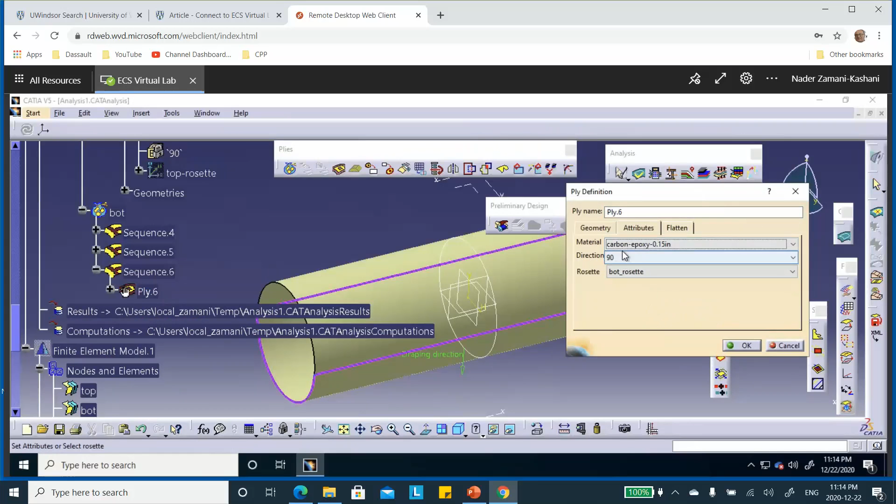That's good. And I'm pretty sure I did the same mistake in ply number 6, which is down below here. So I'm going to double click on ply number 6, go to attributes. Yeah, see, this is the wrong material. The material is the same, but remember, the cured thickness was different. When I was creating these, inadvertently I left this to be 0.05.

So we say OK, and now we're going to run it again. Back to generative structural analysis, we're going to run. Done. So let's look at our deformation first.

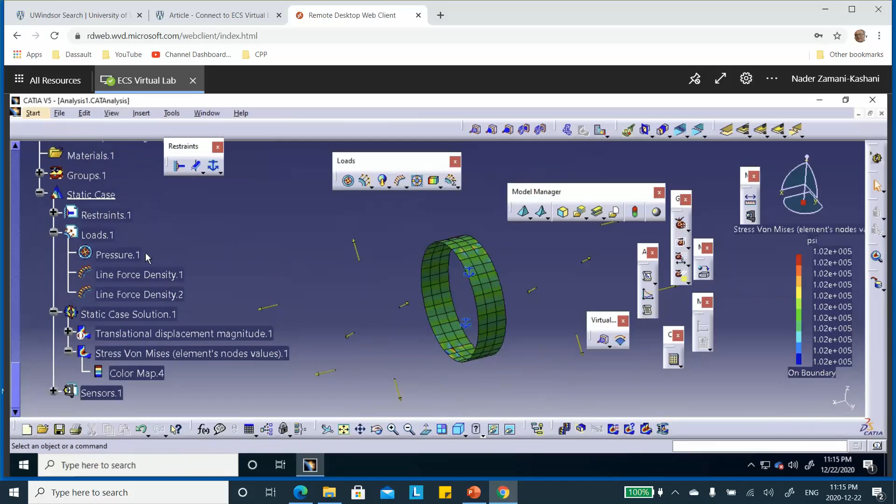Deactivate this. Activate deformation. What I do suggest, although this should have taken care of it, is that we go to our properties and change them.

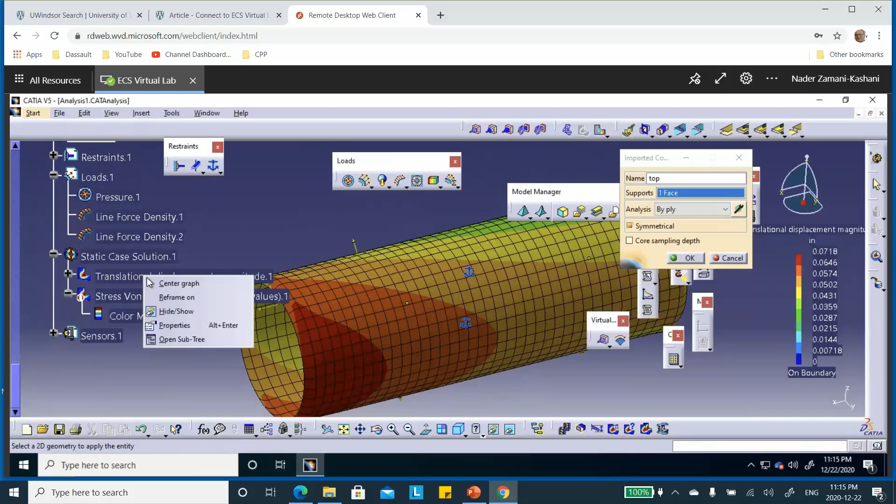Let's do it like this. Double click on top, this is properties. Okay, we got to deactivate this guy first. Cancel that, deactivate this. Maybe it's easier if I just delete this instead. Okay, let me delete this.

Let's go ahead and import composite properties, the top surface for ply. Now we're going to select ply group 1, which was called top. Okay, and do it again. Import properties, the bottom one for ply. Go and select the bottom one right there. Say okay, say okay, and let's go and run it now.

I didn't expect this thing to happen. I would have thought that these would actually go ahead and use the proper material, but because I changed it... but let's look at this.

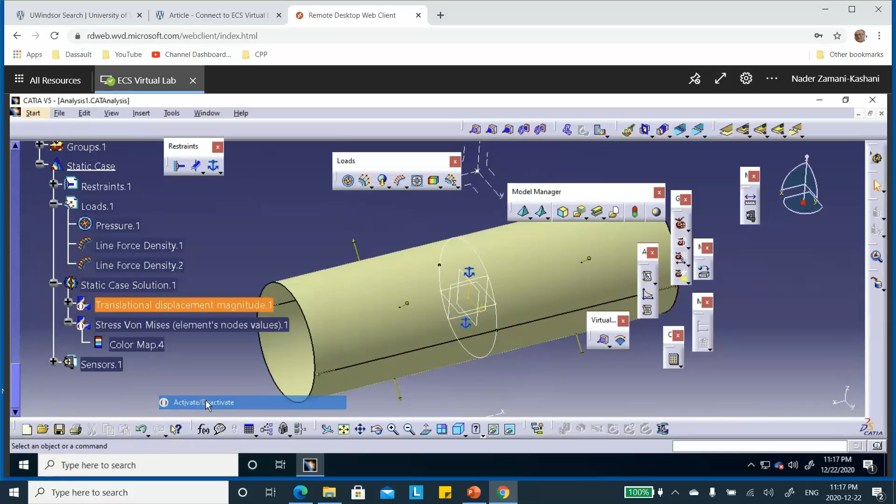Activate deformation. This is better, you see that? This is a lot better. Now deactivate this, activate von Mises stress. Okay, this is a lot better.

So double click, let's go to ply number 1 first. Ply number 1, and what are we getting? 2.74. What does the hand calculation say? 2.7, 10 to the 4. That's for ply 1.

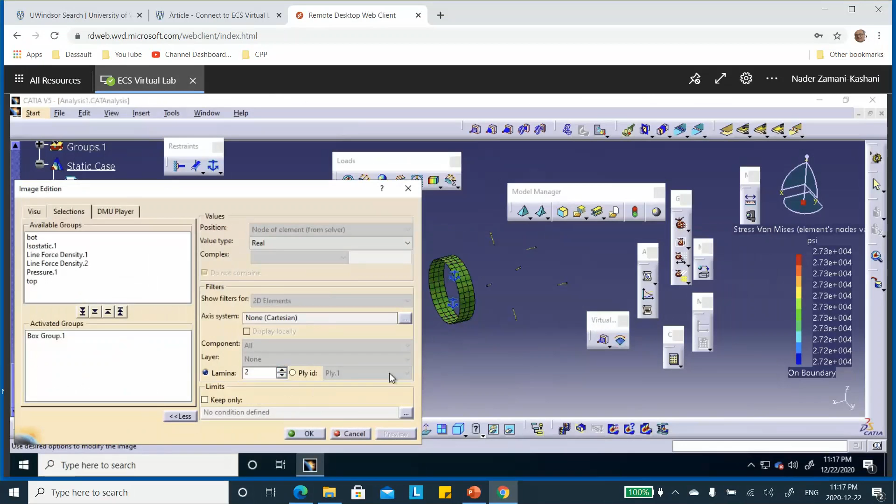Same thing for ply 2. Let's go to ply 2. Nothing changed, same thing. Ply 3 is 3.63, and that's exactly what we've got here, pretty much exactly what we got.

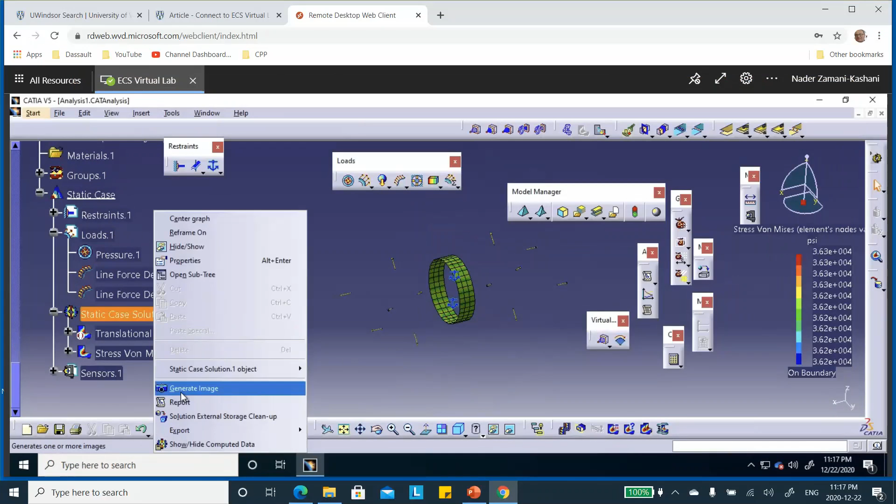Now, this is fine. If you want to see these stresses, one way to do that is to go and say okay, show me. Put the cursor on a static solution, right click, generate image, filter by stress. For example, principal, well actually let's get the full tensor component.

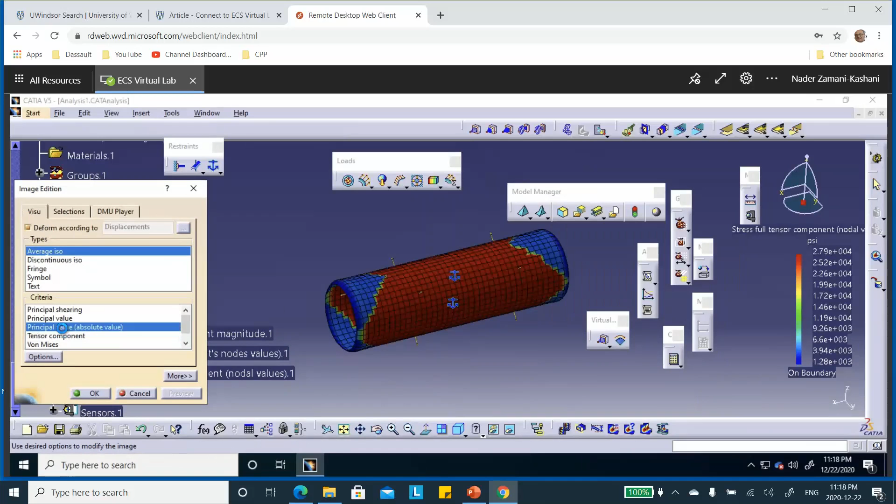Okay, so double click on it and then select, for example under visualizing, select the principal absolute values. Okay, and also show me just the box. Good, see that?

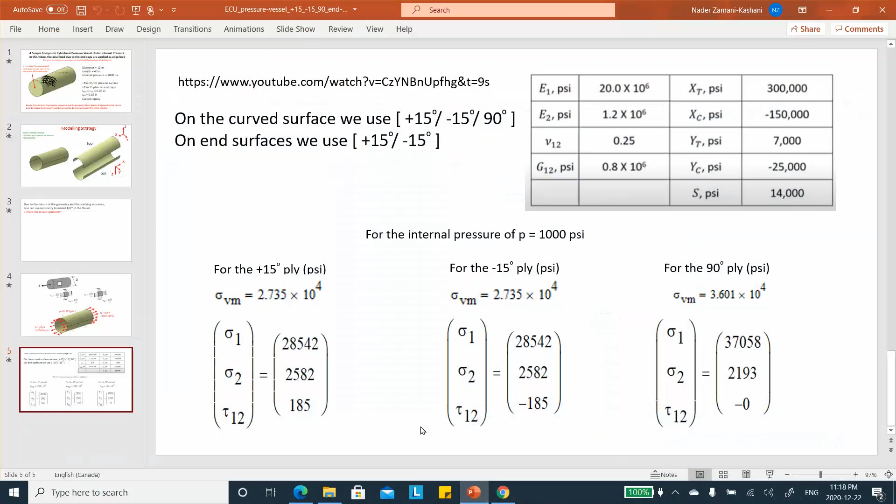Good luck. I'm sorry for this mistake that I made as I was doing things. My material, inadvertently, I didn't change it to the one that went with the 90-degree ply. Good luck.